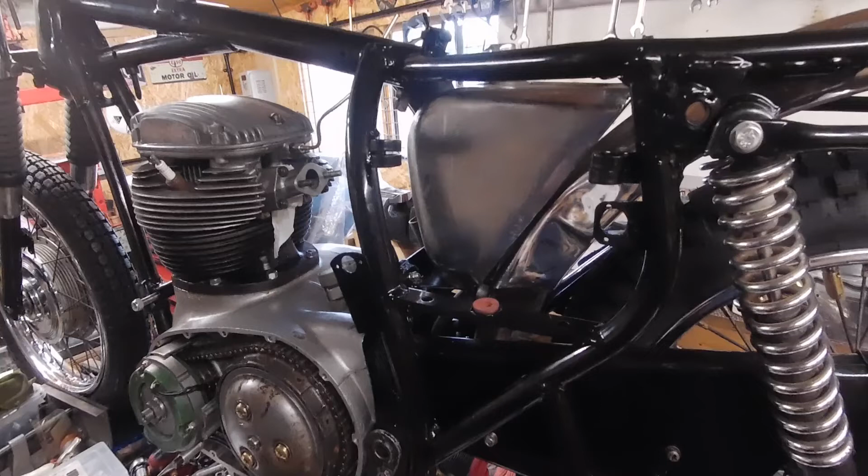Okay, so now going to start looking at doing some wiring. I think I said previously that there's no actual wiring loom that came with this bike, so I'm going to have to do one from scratch, which is okay, I don't mind doing that. In fact, I'd rather do one from scratch than try and work with an old one.

Especially as I'm fitting non-standard components like the regulator rectifier, which I've got to find somewhere to put, and also the control unit for the electronic ignition. Need to find a home for that, and I also want to try and incorporate a little fuse box somewhere, so I'll need to find a home for that as well.

I'm going to be using some thin wall wire. This is 16.5 amp, I think it is, so that should be perfectly adequate. And I've got some thick stuff there for the battery connections.

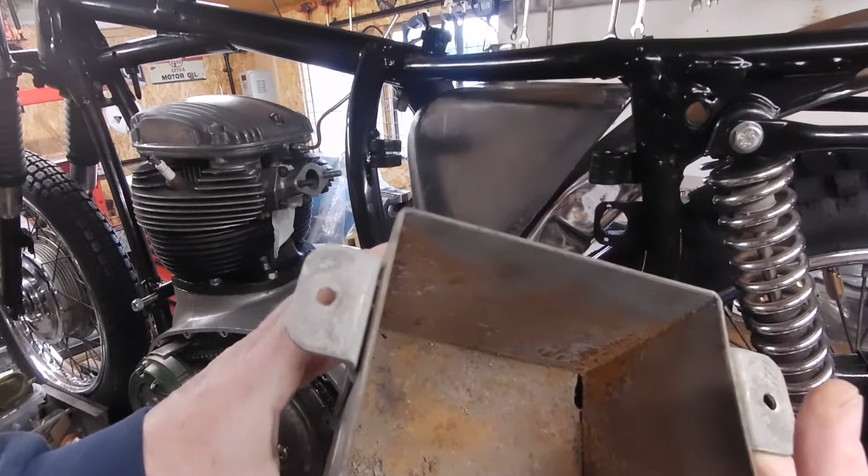And the other thing is, I did actually get a new battery tray. Don't know if you can remember, but that was the one that was on there, which is obviously not correct, with this big box thing on it. Yeah, I did consider cutting all this off and just using this piece here, but really for what it cost for one of these, it was just as well to get that.

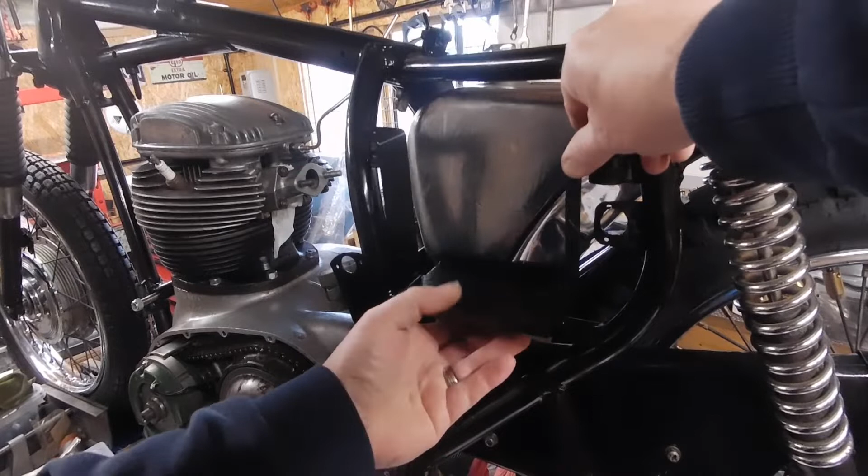I am just waiting for the special rubbers and special bolt that goes up, because none of that was on it when I got it, just to fix that in place, which hopefully will be here this week so I can get that attached.

But in the meantime, I can be working out where I'm going to put these other components, and I've also got a very basic wiring diagram. Tried to stick to the BSA colours where possible. Obviously some of these are different where there's a wiring loom that comes with the electronic ignition stuff.

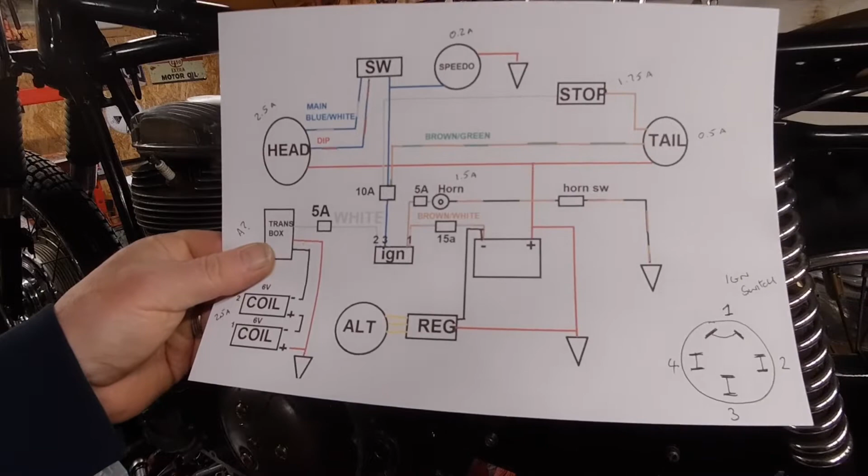So I'll be using that, and also the one that's attached to this regulator rectifier.

Yeah, so I'm basically kind of ready to start having a look at this, how far I'll get with it. We'll have to see. I've not as yet got a headlight or tail light, but that's kind of irrelevant really for this, because I could just leave some long tails, and a horn. I've got to get a horn as well, but I could just leave tails for that.

Yeah, so really can sort of make a start. I think the first thing is deciding where this is going to go, because this is probably the biggest component. I have seen other people fit them under there on top of the oil tank.

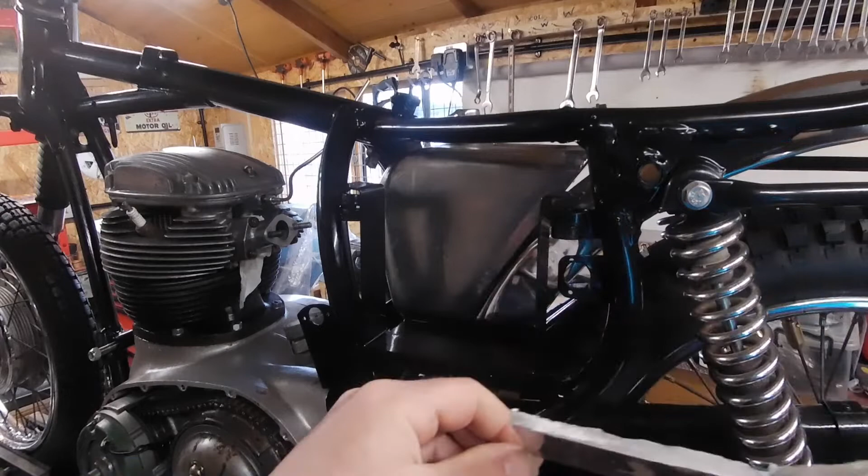That's not quite in shot there. Move it up a little bit. Yeah, sort of in here. So I might start with trying to make a plate to fit that to. I've got some various bits of aluminium plate. It's probably a little bit on the heavy side, that, but it will work. So I think that's the first plan.

I think will be to try and figure out where everything is going to go, and get it fixed in place, and then from there I can start running the wires to the various components. Yeah, so that's going to be the first thing.

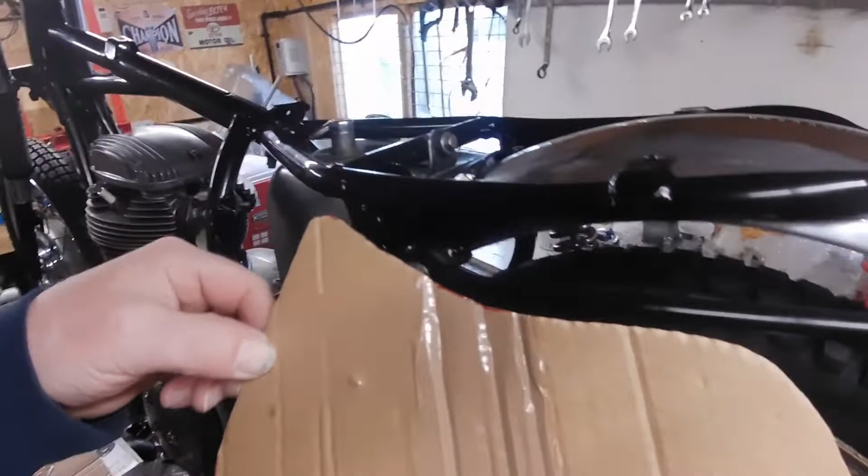Right, so I made a cardboard template, which I'm hoping will, once I cut it out, fit something like that. There is an existing hole there, which I think the previous owner must have drilled for some reason, so I can reuse that as a mounting point, and possibly a bracket off this fixing bolt here, the oil tank fixing bolt, and then I'll just need something over that side to hold it, maybe a P-clip or something I could use.

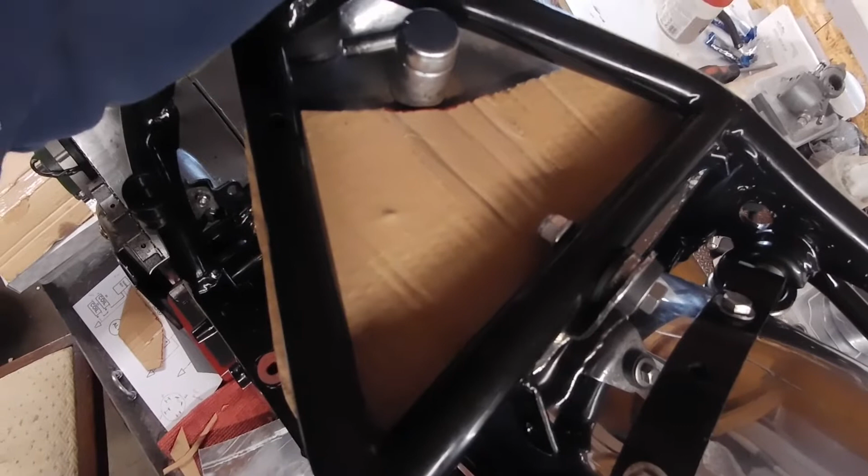Don't really want to drill the frame. In fact, I think I've already filled in a hole there before this frame went off. I think it was there. Yeah, I probably should have left it, by the looks of it.

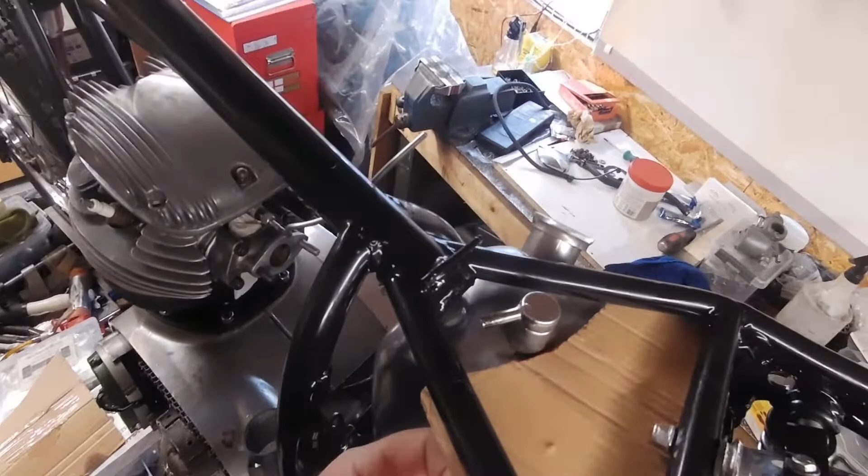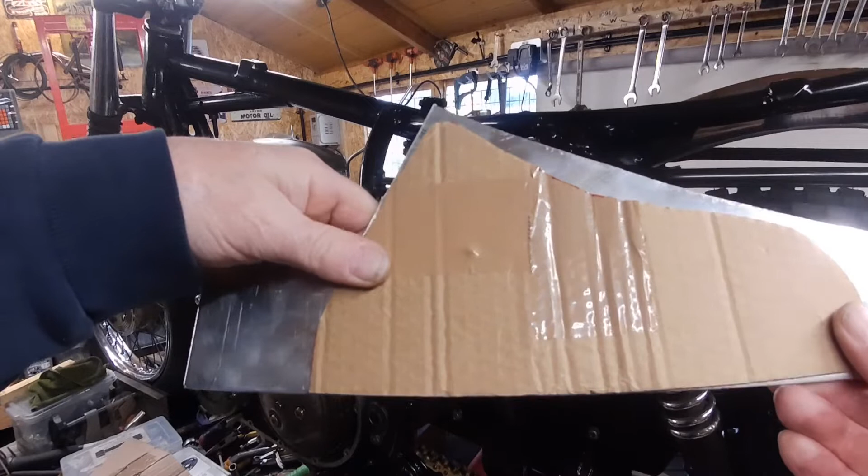But yeah, so there's my pattern, the template, and I think I should have, fortunately, got that in the right place on there. I should be able to cut that from that piece - this is 4mm aluminium, which is a little bit over the top, but I've got it, so might as well use it.

Right, got the thing basically rough cut. However, one slight problem is that won't quite go under - it gets caught up on this back frame tube because I've got this bracket here on the oil tank. It's just not allowing that to go down far enough.

Yeah, so I'm gonna have a rethink somewhere, I think. Find some other way around it. I did think about going off the top.

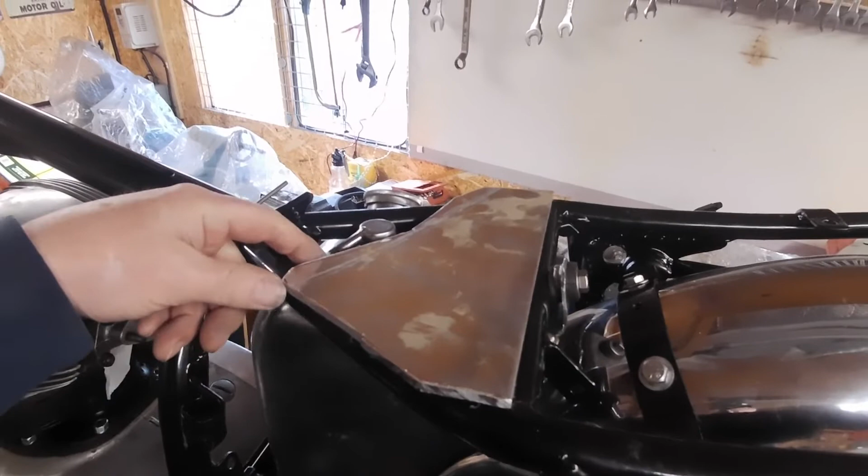Not on there, but I don't think there'll be enough clearance for the seat. Or if there is, that'll be very tight. So back to the drawing board, by the looks of it.

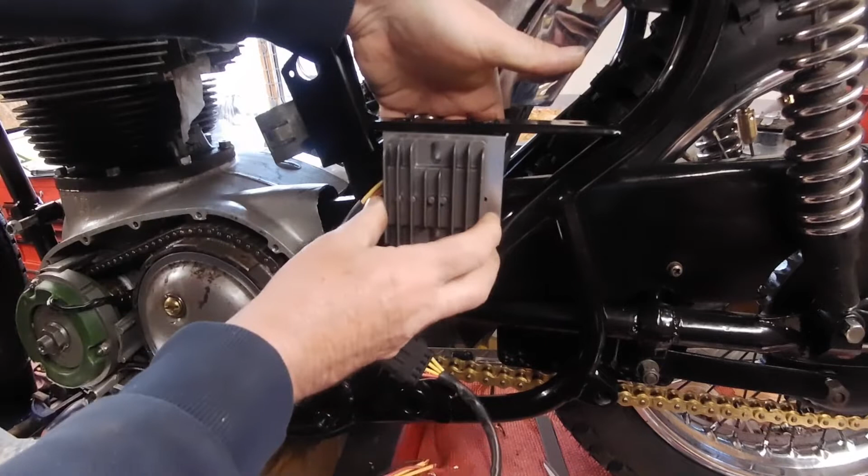Right, plan B. I'm going to use this bracket, fix that under there. I might just have to trim that corner off and that corner, and then I can mount that somewhere on there, because this will all be behind the side panel, side cover, so you won't see any of that.

So I think the first thing is to cut this down so it'll sit a bit further back, just to make sure I'm going to have enough clearance on the front for the side cover. So I think that's what we're going to go with.

So I'll just trim these corners off in there, and then there are a couple of holes already in here that I can use, and obviously I'll need to leave a hole for when that goes through there. So that goes very far through. Yeah, that just about sticks through there, so we'll need to just allow for that.

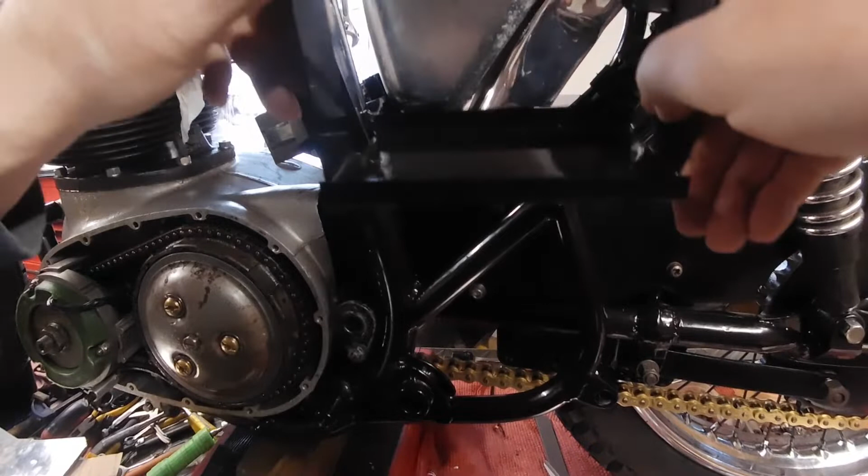But I think that might be the better choice. This can probably just be fixed up the top, maybe with a P-clip around the rail, and cable tied. I don't think that'll be too much of a problem.

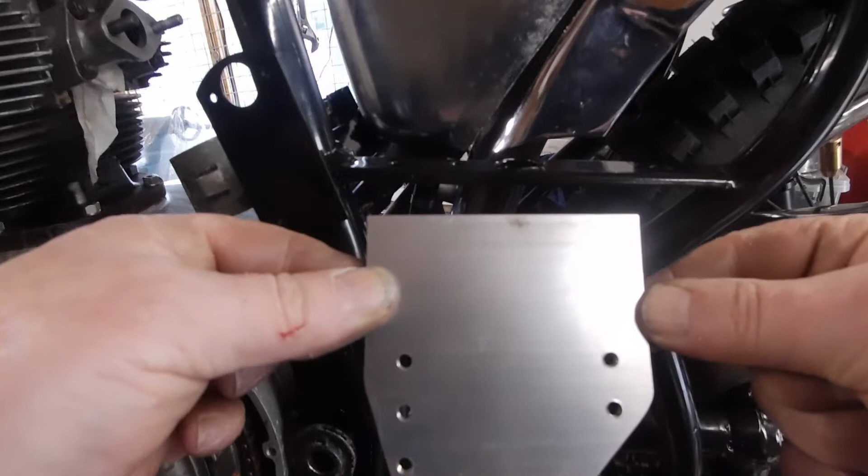Alright, so that's the bracket, shaped a bit to fit in a bit better, and I've just put some riv nuts in there to attach it on with. It's a little bit easier than trying to get around the back with trying to put nuts and washers and stuff on.

I will just use washers on the top, I think. These are just M6 riv nuts, and hopefully for me things line up correctly. And there.

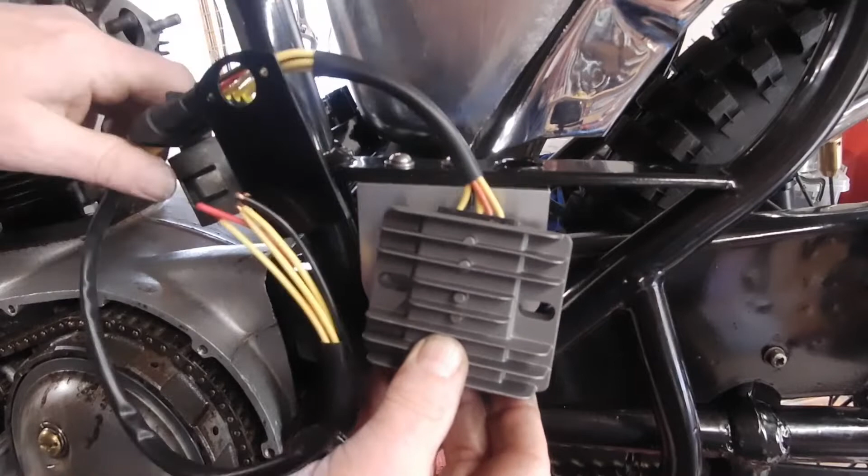Right, I think that should work quite well. The only thing is now is to work out exactly how or where to position this. I might even be able to use some of these existing threaded holes, because they do actually line up perfectly.

I think I might just attach it and see how much shows on this corner when the cover goes on, just see how it looks. If not, I might need to just drill some more a bit further up. Try there first, see how it looks.

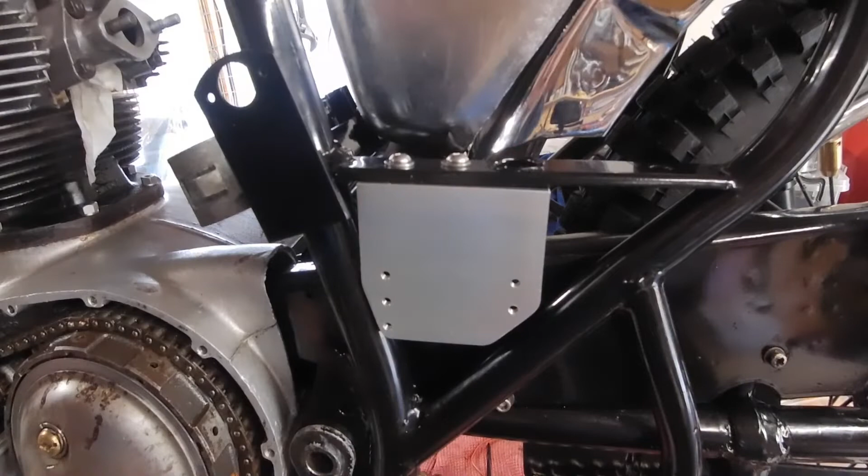Right, so that's that fitted on. Do need to get some better washers, these aren't quite the right size. I'll either see that, or re-drill those and tap them for M6. So I think these are probably what they should have in there.

So the cover will go somewhere there. Yeah, that is actually not going to work, I don't think. I'm sure that shouldn't be that far out, that cover.

Yeah, so that is going to have to go up a little bit. That should be somewhere around there. Yeah, that's going to have to go up, either up or at an angle. I'll have another little play about with that and see if I can get it in a better position.

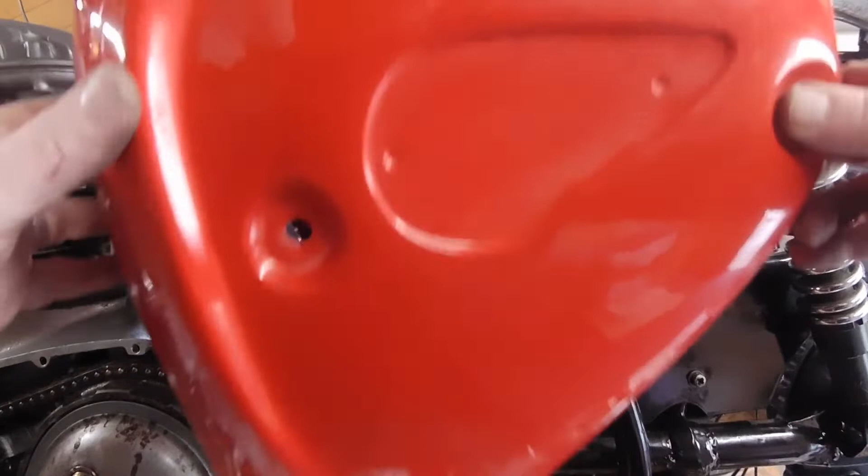Right, that is about as high as I can get that. This does fit a little bit better. It's still not quite, it's still a little bit tight there. And the other thing I'm not quite sure of is exactly if this is in exactly the right position.

That rear one there, because I haven't got the proper clips in there as yet, so it's hard to tell. That one is in line with this one, which is fixed to the frame. However, the front one is a little bit out. This one is too far forward.

So whether that bracket has not been made very well, it's almost as if that should be twisted back a little bit, which, if it is, I think that will probably help. It's a little bit hard to tell until I actually get the proper fixings in there, because I'm not sure how far this is meant to stick out. So I think the next thing is to order the clips that go on there, and see exactly how that is going to fit, because there is still a little bit of tightness here.

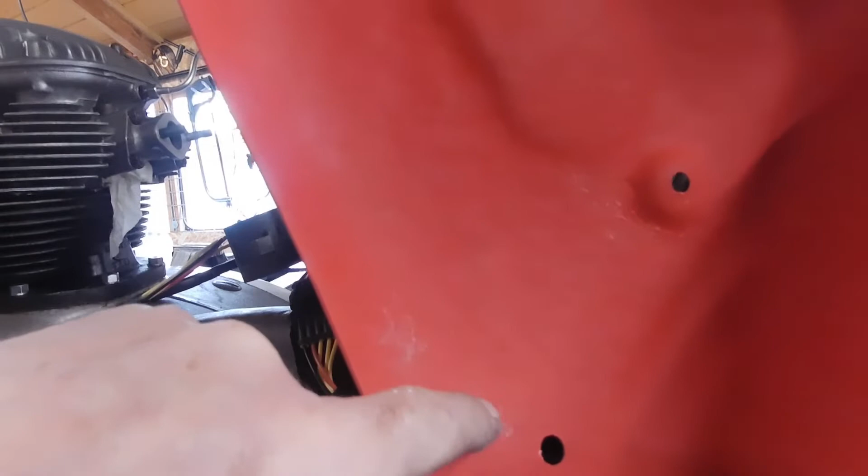The only other thing to do is cut a little piece off these lower fins, because it's just rubbing on that lower corner. So that is one option. It can't go any further that way, and it can't go any further that way, so if it does go there, that's where it's going to have to go. I did look at fixing this on the back, but there just isn't quite enough room, not with the bracket fixed here anyway. I would have to come up with some other way of fixing the actual bracket to this cross member.

Yeah, I think what I'll have to do is order these Oddie clips and see exactly how this panel fits on, exactly how much clearance I've got. It's all a little bit of guesswork at the moment.

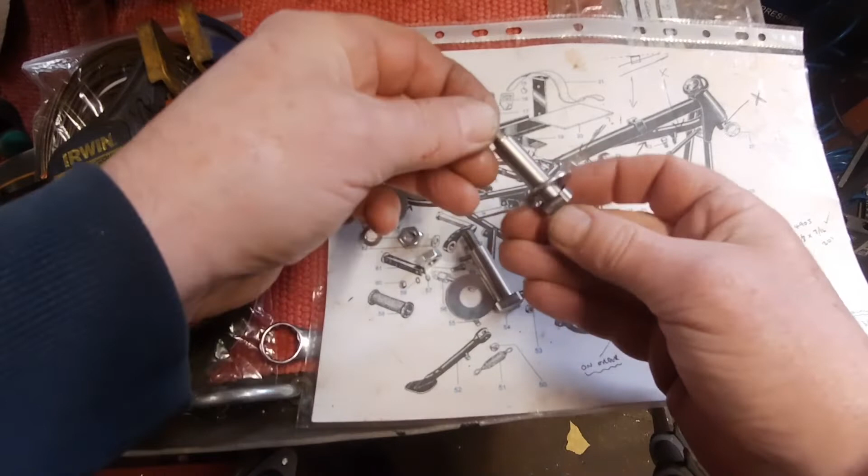Right, now you've got the parts I need to put the battery carrier in. It's got these shanked bolts and 3/8 washer, then there's a rubber, these 9/16 washers, another rubber, and then a spring washer, which don't want to go on. Let's try this one - spring washer and a 1/4 inch nut. So that's the basic layout.

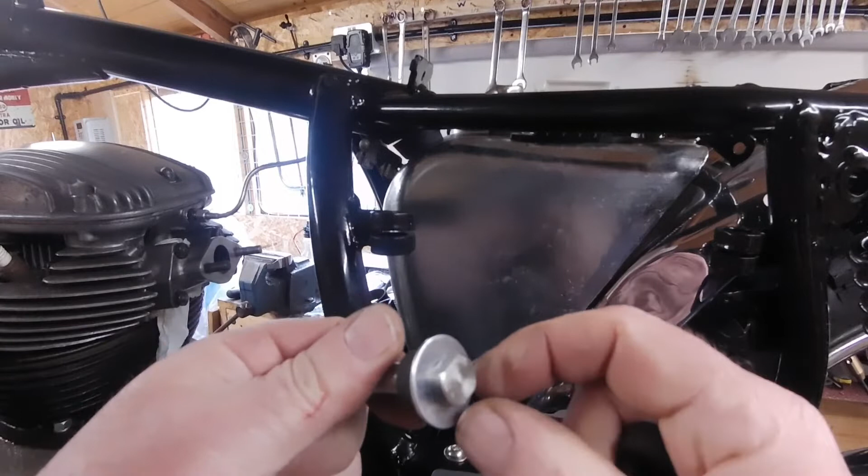So I'll start getting these, get this battery carrier on now. That's a little bit tight. Let's try that one. Oh, that side is okay. It needs opening out a little bit. It's got nipped up, I think.

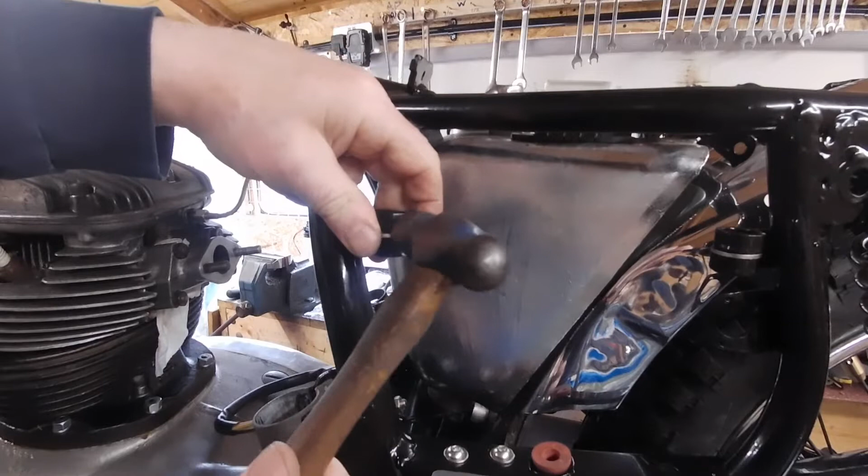Probably too much now. Let's try that other washer in there. Yeah, a little bit tight at the back. Right, so that rubber in there. That should push up like that. Not going to stay there though, by the looks of it.

Rubber on the top, perhaps that'll hold it. Don't let these shanks be too long. Well, the rubbers are too short - look like the rubbers are too short to me, because I would have thought that is meant to isolate it.

And by the time that goes on, there and there, there's nothing kind of pulling that down. I wonder if that needs another bit of extra. Oh, perhaps that's how it goes, just sits like that.

Yeah, perhaps that's it. Right, spring washer, nut. I think this frame has all got a little bit bent out of shape, because that is a bit of a tight fit. That needs pulling over a little bit.

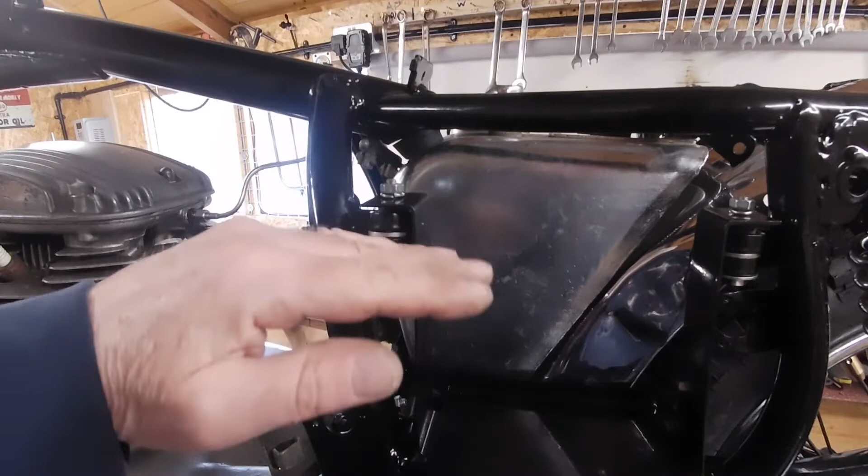What I want to do, if I can find it, the fuse box, is mount that on the top. I've had a look at batteries, and I can find one that will fit, and it should come sort of back there somewhere. So there's a little bit of clearance in the top there.

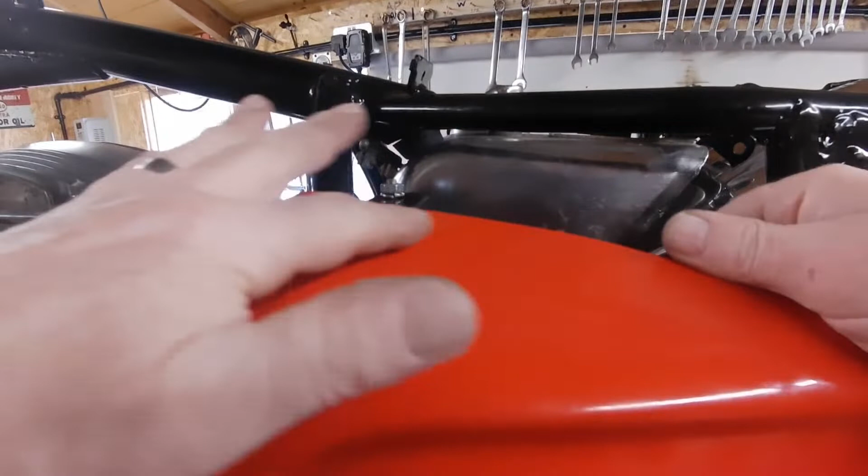A piece of aluminium plate, if I can cut a strip of that to go across the top, and then mount my fuse box on there. I think that's what I'm going to do. We'll try it. Should just come under there, I'm hoping, and that goes on. So we try it. Oh no!

So next thing will be to cut a piece of aluminium just to go across there - the fuse box. I've mounted that there. I didn't cut this right, it's slightly thick, and also it's got that tread pattern on it. So I did find a smaller, thinner piece, which probably won't end up staying, but until I can get something either longer or wider, I'll try and set this back a little bit further, because it is still a little bit close on this corner to the side panel cover. Ideally it probably wants a bit of an angle like that, but I will need a wider piece of this to do that.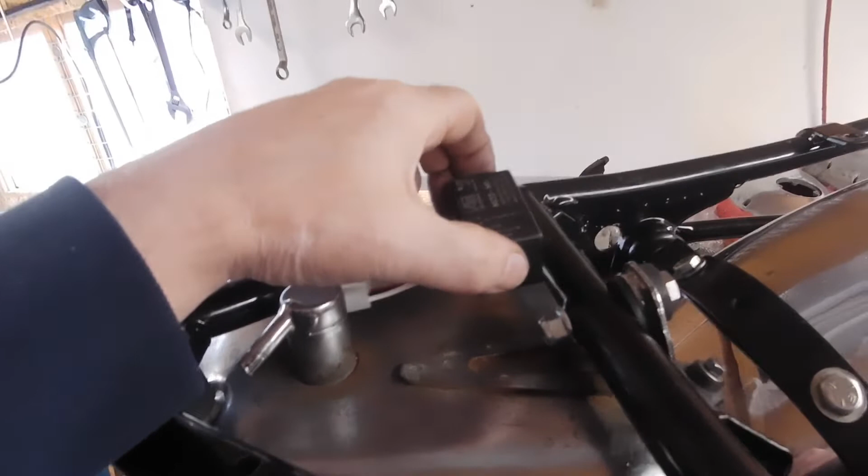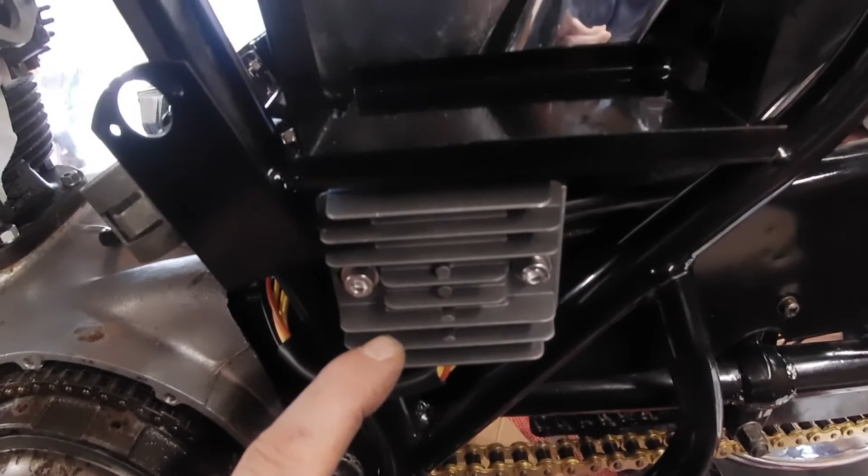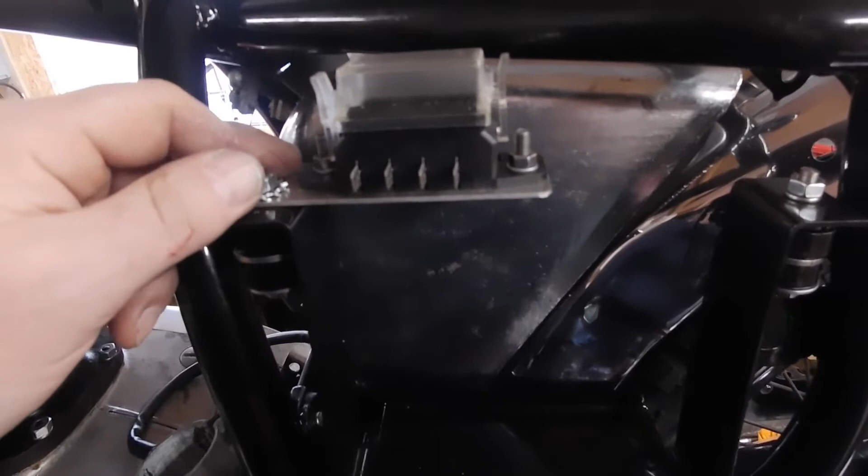Yeah, that's going to be roughly there, so at least I can do the wiring now. I think that's just going to have to sit in there, cable tied maybe. Yeah, so that's going to go there, that's going to stay there, around this area. If that's too tight with the cover once that's on properly, I can take it off this piece of aluminium, or even mount it to the top of the battery with some double-sided foam tape or something. It's going to have to go around there, so as long as I leave enough slack to move it around a little bit, I think that'll be fine.

So now I have all my components in place, apart from the coils, which I need to get, because I need two 6-volt ones rather than the 12-volt ones that were on here. Although I can still wire it up, because I know roughly what needs to go there. So I can start doing some wiring now, at last.

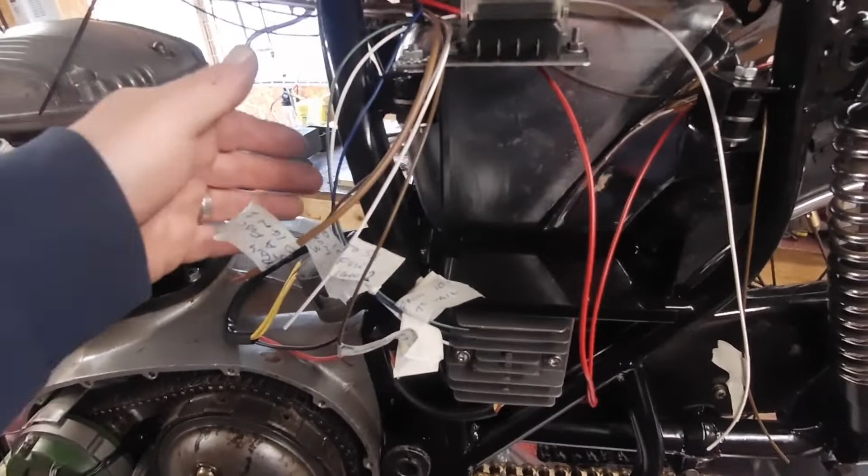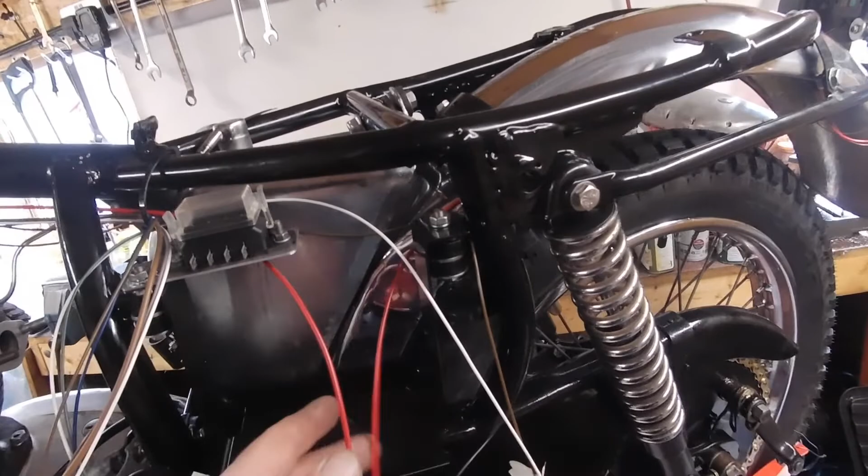Right, wiring so far. These are basically all for the fuse box. Some are going towards the ignition switch, others, I think one or two go towards the back. I've got my common grounds here, and positive earth.

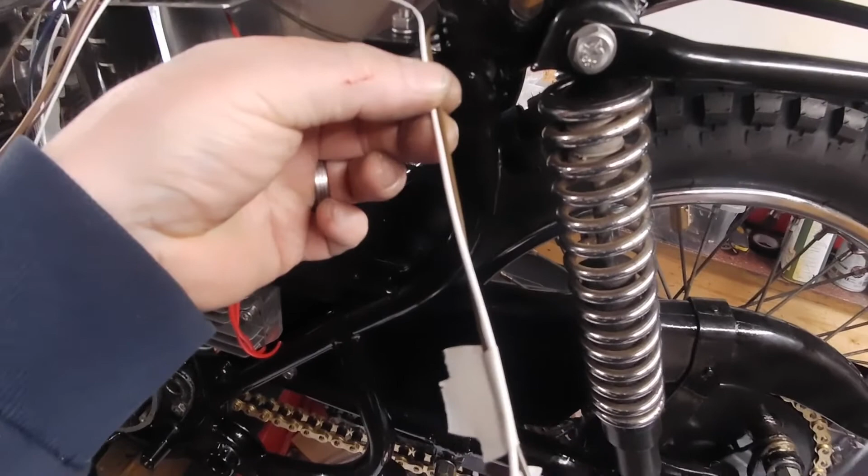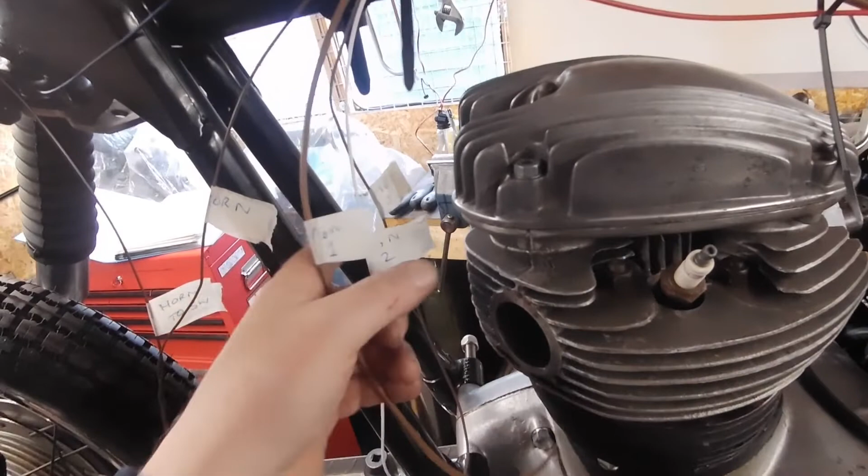These are for the brake switch. Here are the rear light wires. This is obviously going to be the main loom coming up here. I've just got them hanging in cable ties temporarily, just to run them through, the easiest way to do it. These wires here will be for the ignition switch.

It's got the feed in, this big brown one. Then got ignition and what was the other one? Lights, yeah, for lights. So it's ignition and lights there, using a full pole switch, ignition switch. Obviously you won't be using the horns or anything, I doubt.

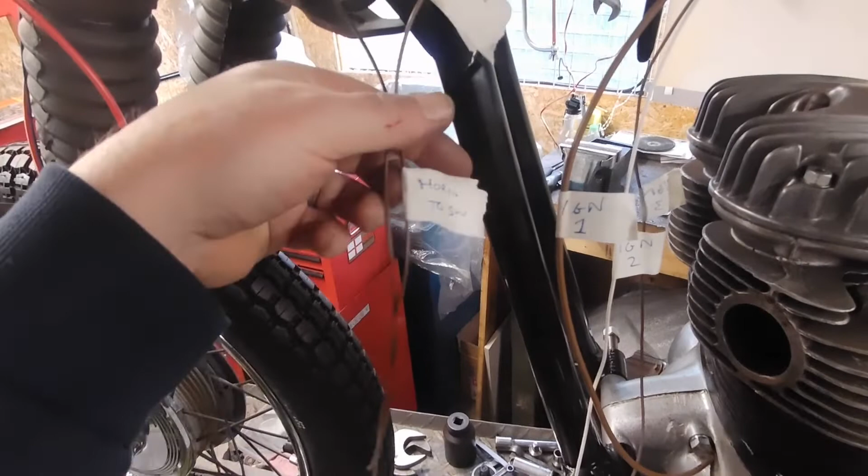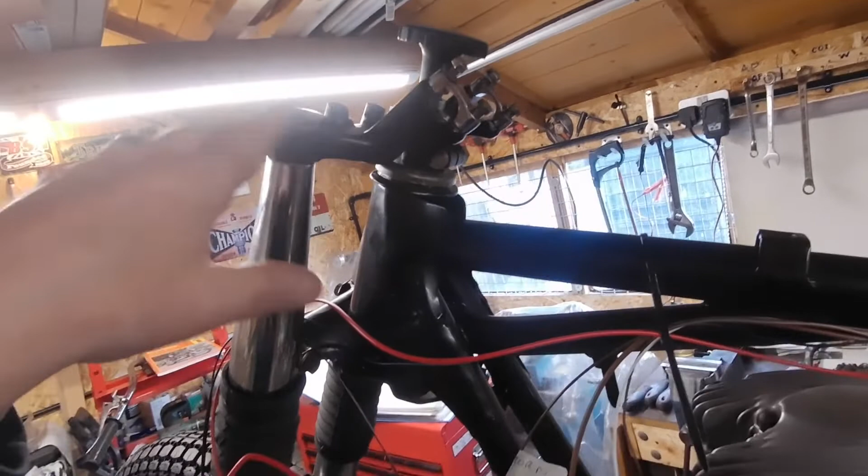Right, and these ones are for the horn. That one comes from the fuse board. That one will go away to the horn switch. And then we've got this will be for the lighting switch, this one here. Obviously anything up the front end I can't really do just yet, but that should basically be everything heading that way.

So I could actually get a piece - I've got some heat shrink, so I'll put heat shrink all over that lot and bunch all these together, whichever side they've got to go. Unfortunately I've run out of connectors, so I couldn't actually connect anything up as yet, but I've got to run all the wires through some heat shrink anyway, and obviously a bit of heat shrink around that to the rear.

These for the ignition unit, they've got their own kind of looms, so I don't really need to do anything with them just yet. I can do them at a later date, same with these really. These have only got to be connected to the alternator wires here, and these are the battery feed and ground. They can be done at a later time because they only need to be terminated on the battery anyway.

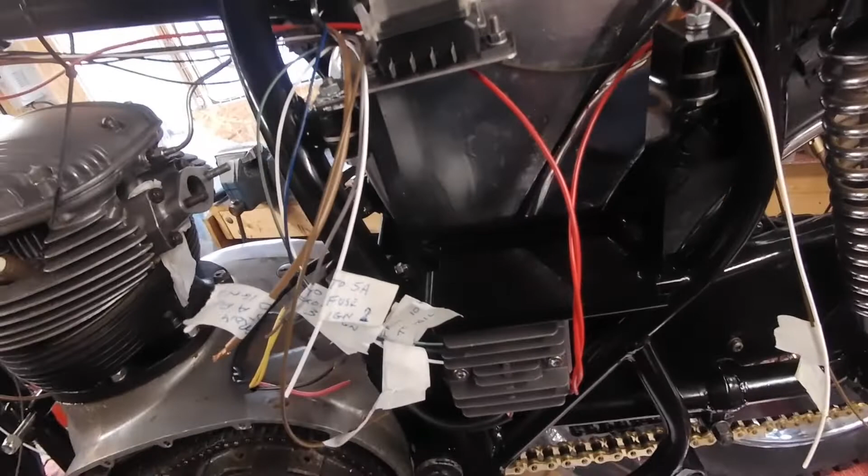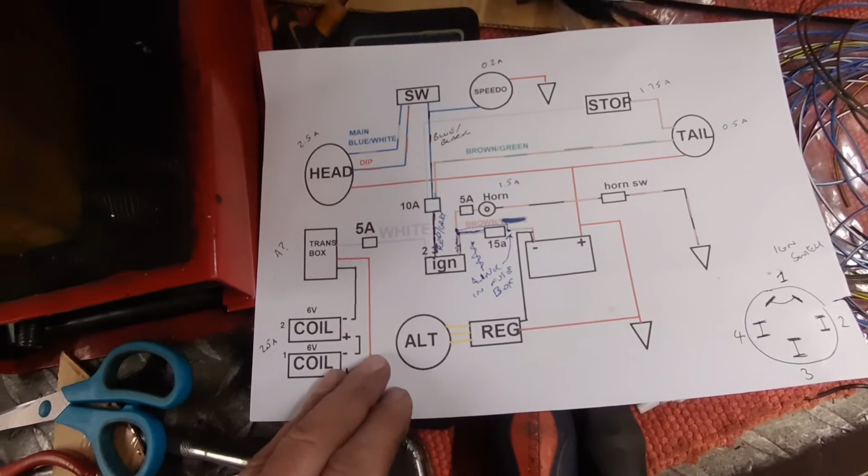So basically, that didn't take probably, maybe an hour and a bit to do. Just got to redo a couple of bits on the wiring diagram, change of colour there and there, because I forgot to get some plain blue, but I did have some blue black, so I'll use that instead. What else was it? And red grey there. And what was the other one I changed?

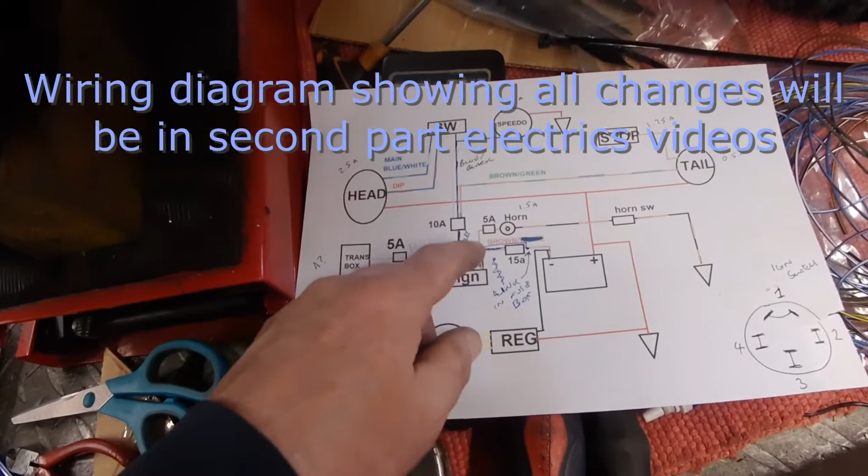Oh yeah, I originally had this come back from the ignition switch, which seemed a little bit pointless. I could just pick it up off the 15 amp main fuse, 5 amp for the horn. I can do all that at the fuse box really, do a little link cable there. So basically that is just about it, apart from putting everything in heat shrink and terminating. So not too bad at all really.

Right, so got some heat shrink on there. I've got my ignition switch wires, horn, and these ones that go up to the headlight. That will obviously need a bit of heat shrink on there, but until I get the headlight on, I don't really know what sort of length.

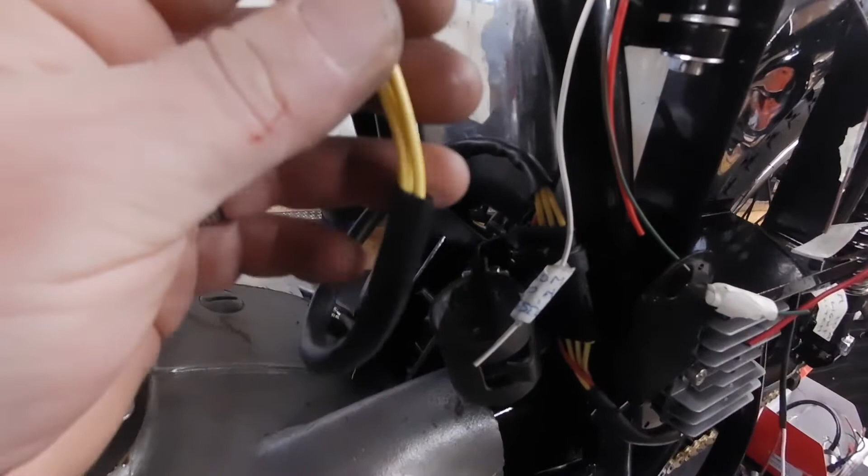And oh yeah, this one, the regulator rectifier, I did just separate so we're all in this one sleeve here. I've just separated the alternator ones from the battery ones, so I'll split those. These now come up here just to make that a little bit easier.

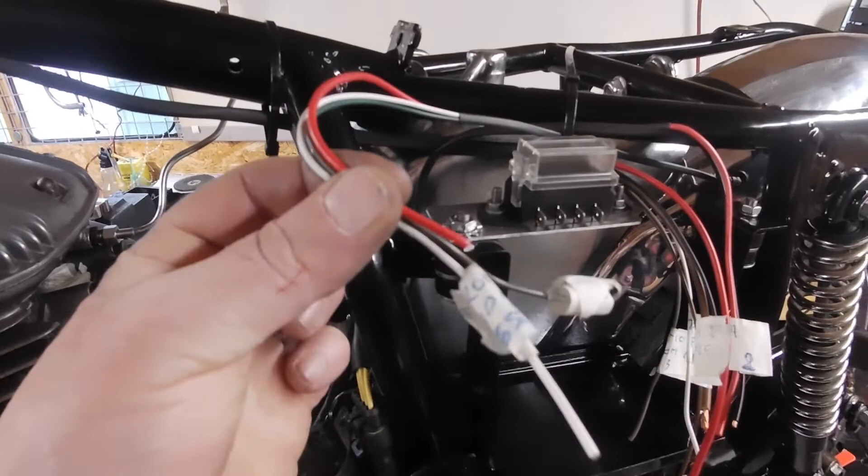So these are all the ones that come in the main loom here, which all got to go onto the fuse box, and battery or ground, and these are the ones which go to the rear, and this is the brake switch wire.

Ready. Yeah, so I've tucked all them under there with some loops built in that mudguard which I've used, and yeah, just got to drill a hole for this to go through once I've decided on what sort of tail light I'm putting on here. So that is pretty much it, apart from the connections on there and battery connections, alternator connections, ignition switch, headlight, just about there.

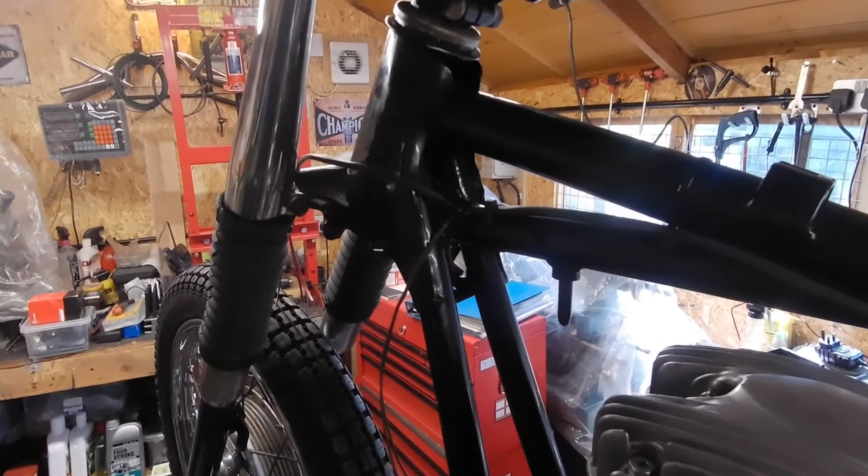Alright, doing a little bit more prep. Just been putting some heat shrink over these wires. These are the ones that go to the headlight. That's for the horn, and this one tucked around the back here and through there. It's for the ignition switch, which fits in here.

And so I can get that in, I've just had to take the damper off, the steering damper. Have a look at the switch in a minute.

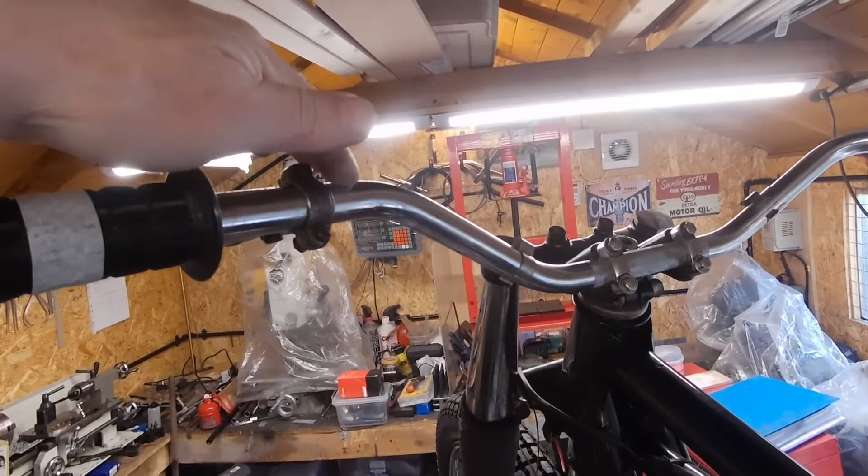And the other thing is I've fitted these bars on. I don't think these are the correct ones actually, I think they should be a little bit higher, but I've put them on because I need to mount the switch so I can get a rough idea of how long I need to make the wires.

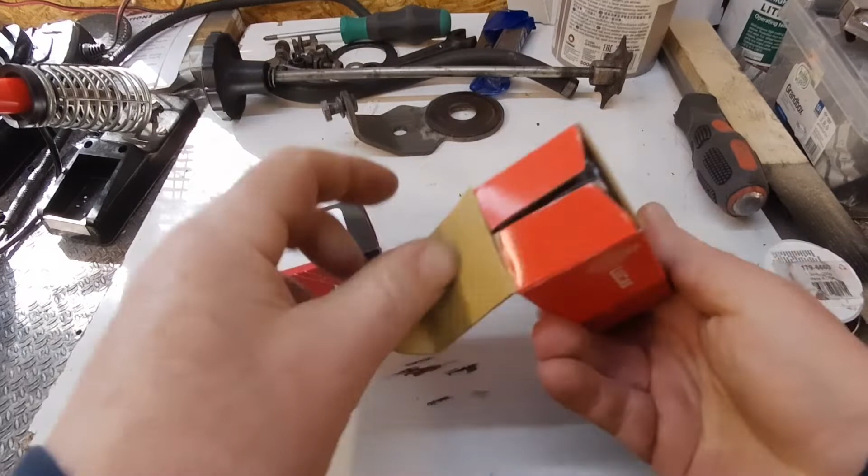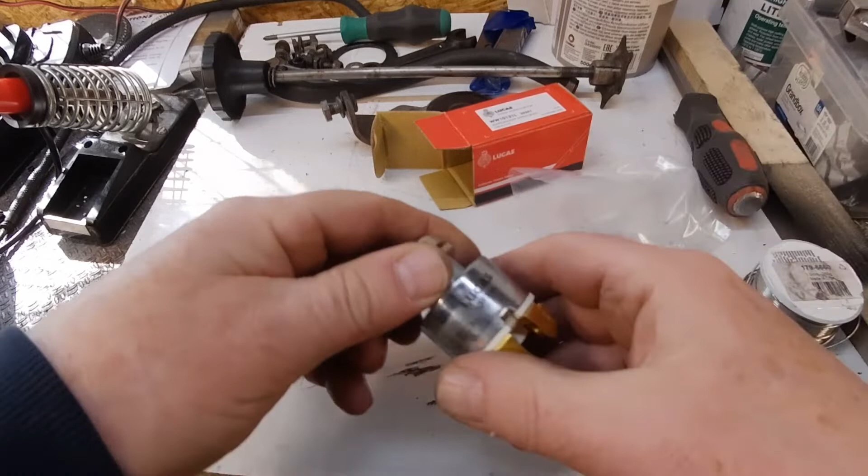Okay, ignition switch. This is actually meant for a later bike, I think 1970 onwards, somewhere around there. I started using these Lucas 35351, which is a 4-pole switch. There is a reason for that, why I'm using this. Not the, what should be on there is a 2-pole, obviously just on off.

This has, sorry, it says off, parking, ignition and lights. The reason I'm using this one is so I don't have to have a light switch, an on-off light switch, just a dip switch. Just saves a little bit on the headlight, because the headlight I'm using is not going to be big enough to have a switch on there. So that's why I'm going with this one.

As you can see, it comes without a barrel lock, which is what this part is. And I think these just basically push in. Comes like that. It's got a little pin on there. I think that's sprung loaded. Yeah, I believe this just pushes in, and that little spring bit hooks in somewhere.

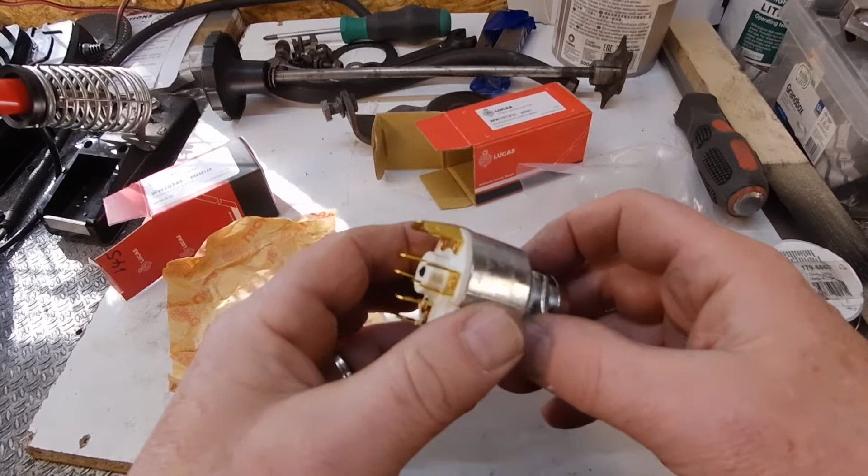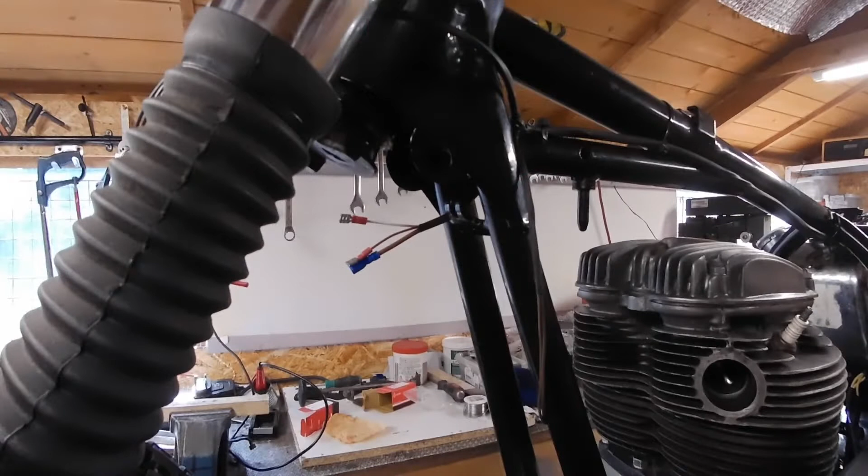Yeah, should go in there. Don't think that's any much deeper than the other one. The only thing I want to do is try and get some sort of enclosure on the back of here. You know, the other ones you can get a rubber boot for, but I couldn't find anything for this one. So I might have to come up with something, see what I can find anyway. Right, unfortunately got the light behind, so it's probably not very clear.

Right, so I've just put my terminals on the wires for the ignition switch. So number one is this one at the top, or one of those ones there. That's number one. Actually, I'll put it in the other side, might be better. Put it on that one. So that's number one. Number two, which is that one there, and that needs to be the white wire.

On there, and then number three, that bottom one, is the grey red. That's just those three wires on there. Right, so that can now be installed.

I couldn't actually find any rubber to go over there. The only thing I had that was close was this, and that was way too big. Well, actually on that way it would have gone, but yeah, that's way too big. So if we come across anything at a later date, I'll just have to change it.

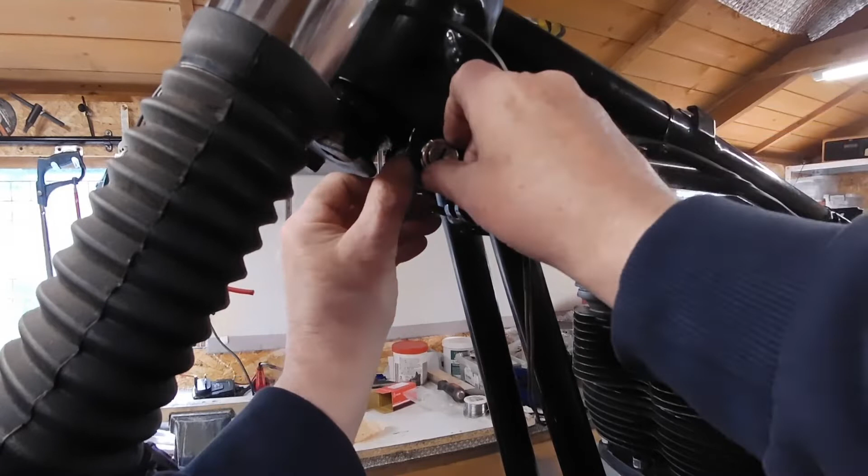That then goes on the front. There's a locking ring on the rear. So if I do that up as far as that will go, and then tighten up the lock ring, or lock nut behind. I think would be the best way to do that.

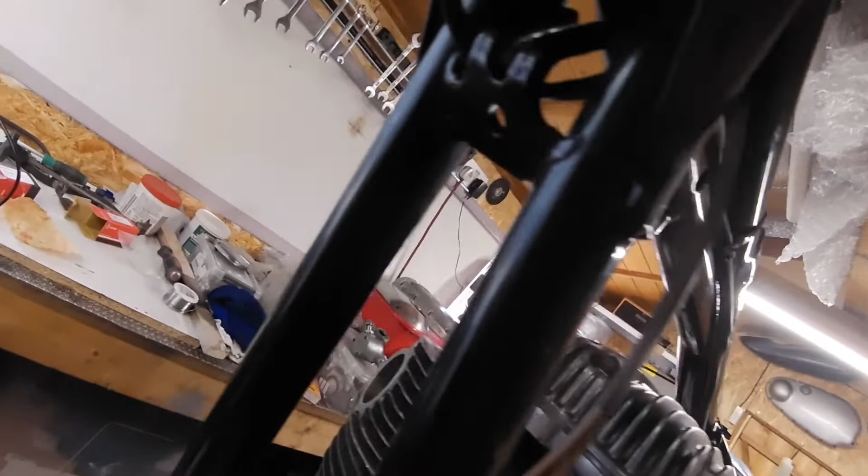Let's get a spanner on there. So that is basically it, the ignition switch. Get in here at a funny angle. Not this is very good at close-up stuff, but yeah, you see that only just goes in there. A little bit of a bend on the back of these wires. I think that'll be okay.

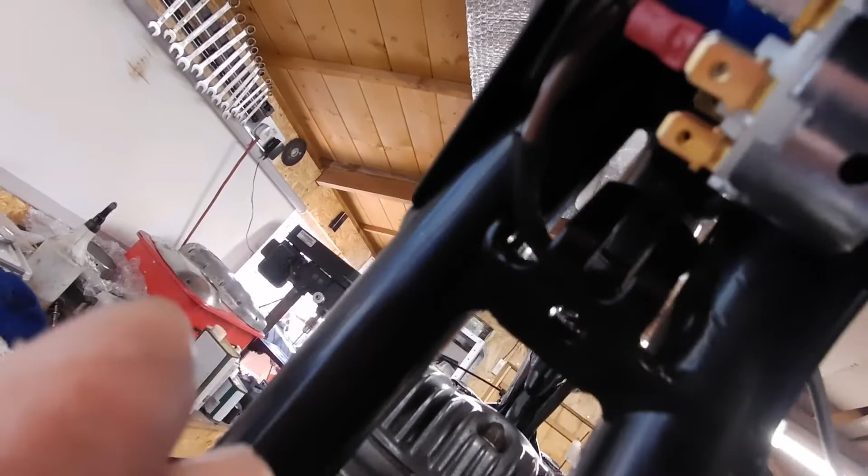Alright, let's just do a little bit of a sanity check here. Let's put this round. Difficult, all these wires in the way. Put that round to there.

Continuity check. So I've got one lead on the brown going to the switch, and that one's on the white, which is the ignition, and this one is the ignition and lights. So at the moment we shouldn't have anything because it's off. So if I now go to position 1, there we are, we have continuity between those two, and there shouldn't be anything on there.

Right, so if I now switch to next position, which would be ignition and lights, so now got continuity to this one, which is for the lights, and I should also have it on this one, which we have. So we know that switch is all good, and the wiring's all coming back here.

Started to wire in the fuse box. I've just swung it out a bit so you can get a better look at it. So far, that brown there is the one that goes to the ignition switch. That is to the horn, and there's 3 wires in there.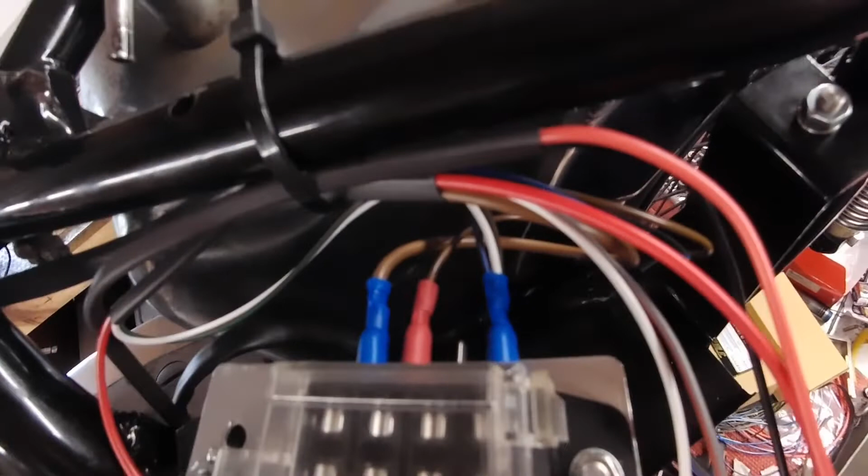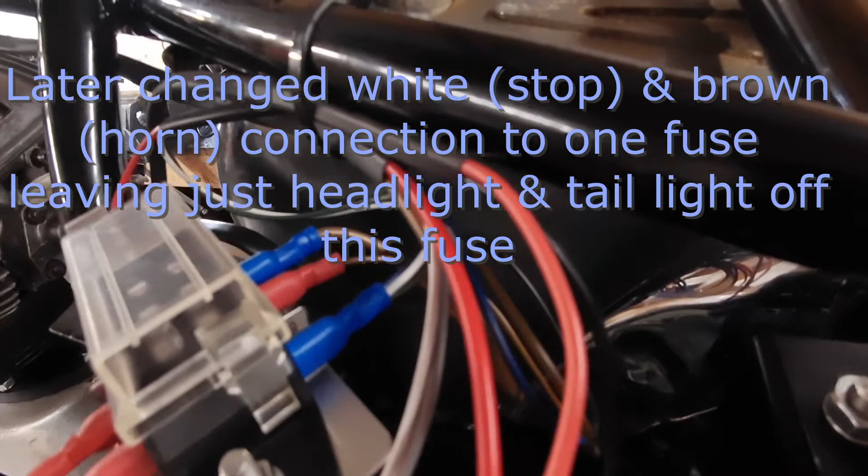One is, get the wire diagram, so it's brown green to the tail light, white to the stop switch, and the blue black will go up to the switch for the dip and main beam. So there's all 3 in there in that one.

So that'll be a 15 amp, 5 amp, 5 amp, 10 amp. And this grey red is from the ignition switch, and the white is from the ignition switch.

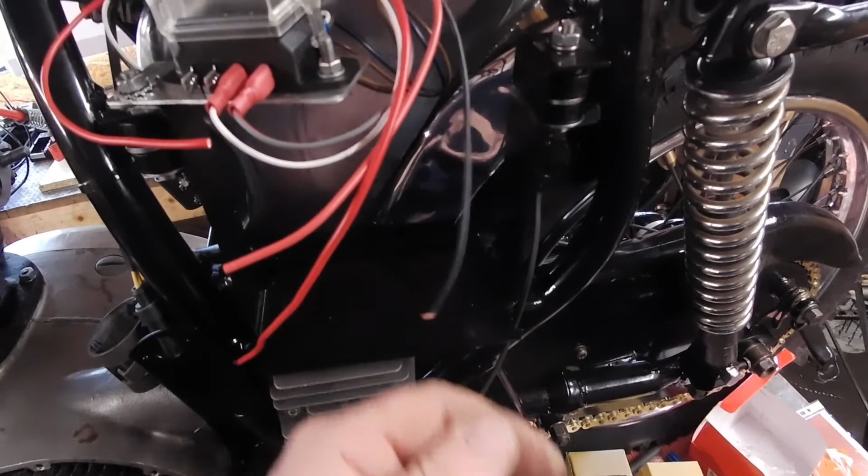So the only ones I've got left to do is that one there, which will be to the ignition module. Yeah, to the ignition, like the transistor box. And then there'll be a link cable across there, or link wire, with one going away to the battery negative, and obviously I've got all these from the grounds, the positive ground and battery connections, and that's also got to go to negative battery. Yeah, that one's from the regulator.

Yeah, so I think I'm now going to have to make a final decision on where this box is going to go. This transistor box for the old wassail there. So there's all this to go on as yet. And I think that's almost certainly going to have to go here.

I can't really see anywhere else. I mean, there is this bracket here. I don't exactly know what that's meant for. Doesn't seem to be doing anything at the minute. So yeah, but I definitely know it's going to fit there. So the wires can easily run away under here. So I think that is going to be where it's going to go.

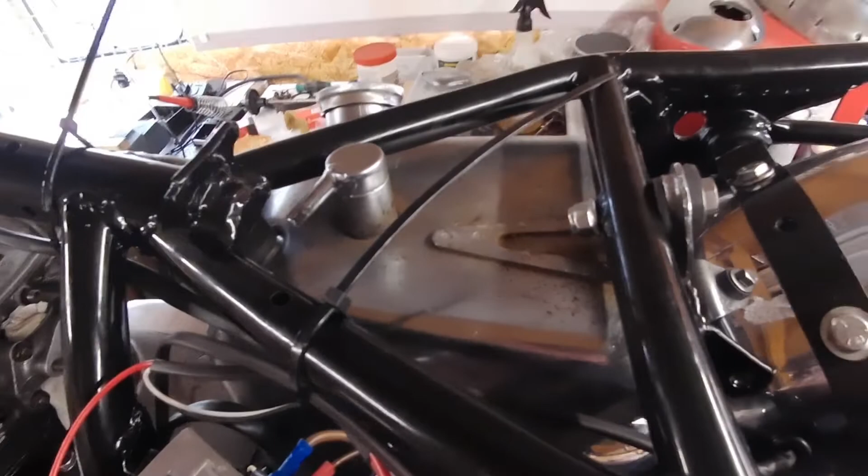This is my main earthing point. So this thicker one here will go up to the battery, and this thinner one here will just be for the coils, which obviously sit here, which I haven't put in yet. And this is the other lead for the coils, which comes from the ignition unit. So I will get those in next and wire them in.

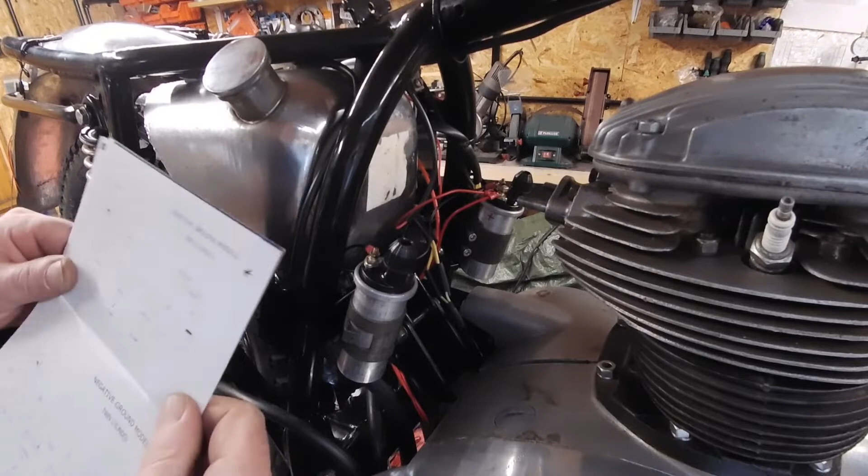Right, coils fitted, wired in. So this is the red black that comes from the ignition module. So we've got the red one going to the positive side of the first coil, and there's also the red ground which I put in earlier, which goes down here. So it's on this diagram, that red one there, and to ground.

Then there is this black lead which goes from this coil, negative side, to this coil, positive side. So that's here, that's that black lead there, and then there's the other black lead which goes back to the ignition unit from the negative of this coil. So these are wired in series.

They're two 6-volt coils. This system runs on a wasted spark system, so it probably doesn't really matter which way round you put your first wire, as long as you wire them in series. Yeah, so that is that done.

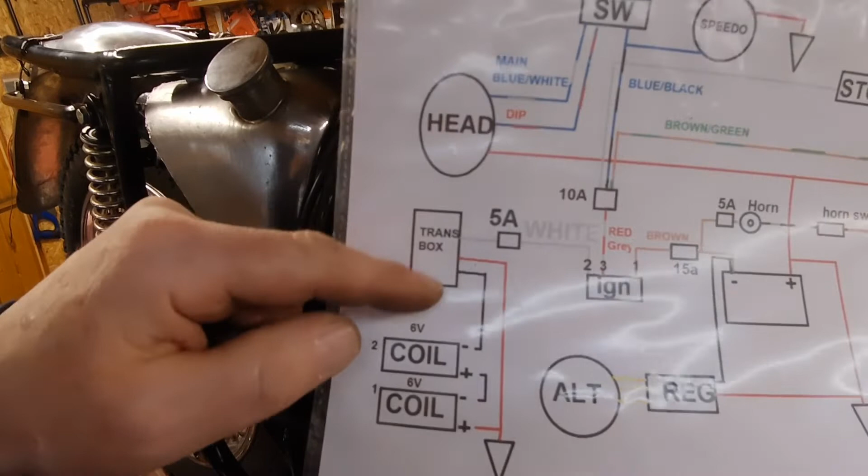Leaflet. There we go. Right, so that's on my drawing, probably a bit clearer. So that's the little module. Red wire to ground and also to the positive. Black from negative to positive, then the other black wire from the unit to the negative on that one.

So that is sitting up there, and these are the two little connectors just tucked behind there, and they've also got the, to bring you down a little bit for, maybe it's easier off the tripod. Yeah, so that's the other connection for the pickup unit.

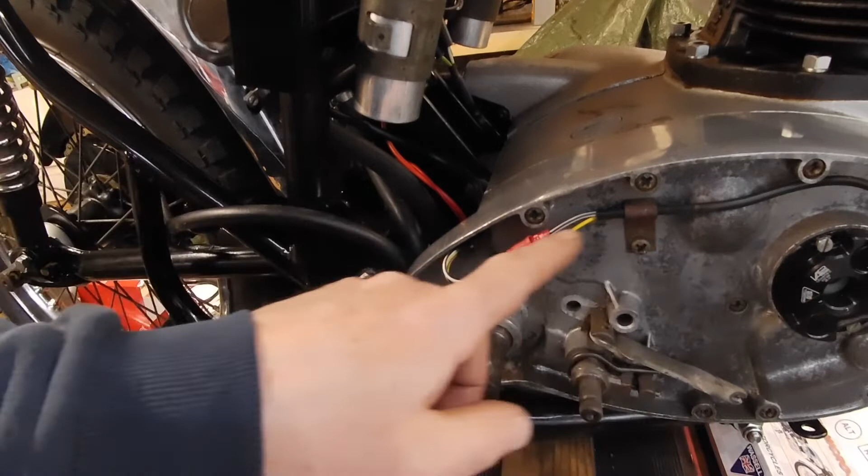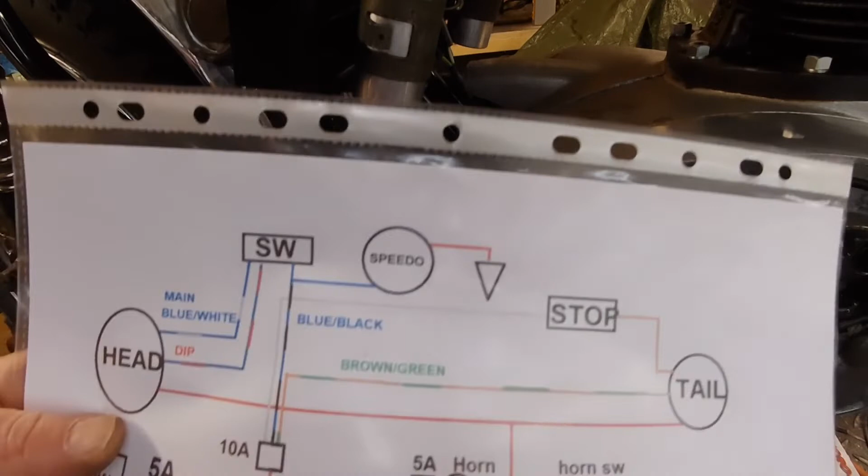So that is all wired in now. I've got the handlebar switch to rewire because I want to change the colours on that, if I can find it. I think I might have left it indoors actually. Yeah, I just want to change the colours so they match my diagram. So I'll rewire that and get that on the bars.

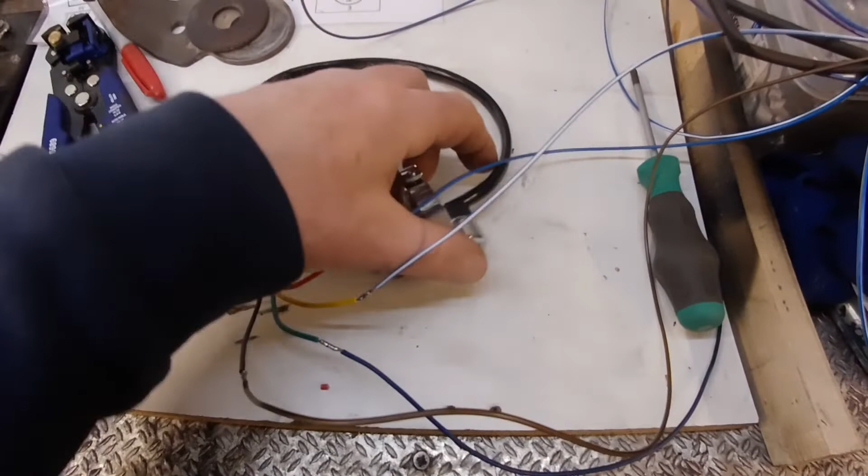Right, found my switch. That was right in front of me, couldn't see it for looking. Yeah, what I've done, I've actually just extended the appropriate wire to the colours that I'm using, because this was going to be too short anyway. I would have wired it right back, except I was a bit short on, which one was it? That one, I think, the blue black. I only had a short piece of that left.

So I just need to get some heat shrink on these joints and extend that, or I could even put a complete new piece right over the whole length. Might actually look better. Although this is flexible stuff, so I'll see where this joint ends up when I put it on the handlebars, see whether I'm going to actually extend this or just put a new piece. I think that'd be the best thing to do.

Yeah, so that'd be my switch. So that would be my low or dip and high beam, and that'll be the horn, and that one is meant for a kill switch, but I won't be using that. I don't need that. It's not actually wired in the back. That's what that's actually meant for.

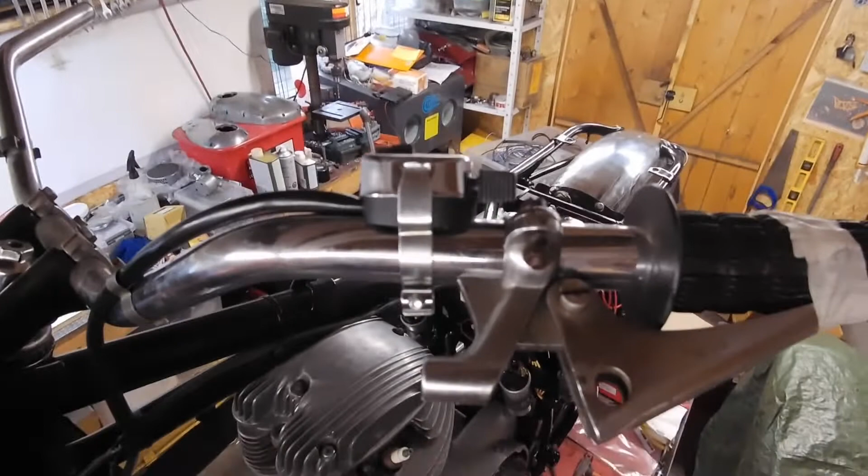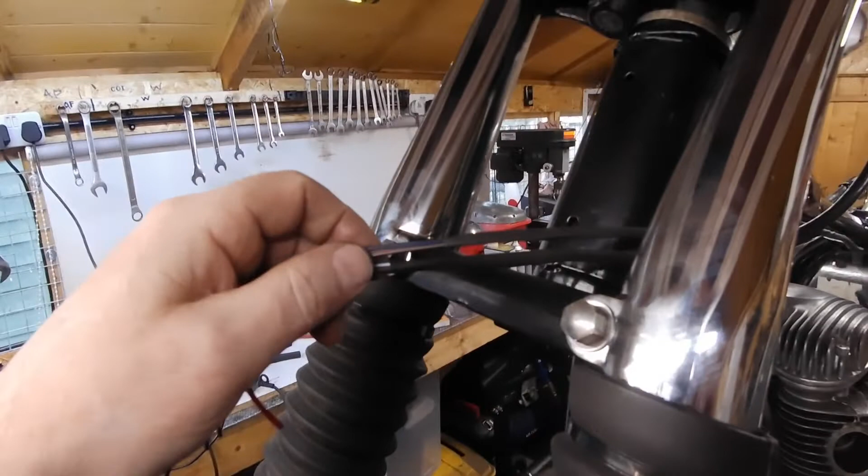Yeah, so I'll get this sorted up and have a little test fit on the handlebars. Right, switch is mounted up there, and cable running down there. I'll come through here, and when I eventually get the headlight, these can all be connected up inside the headlight.

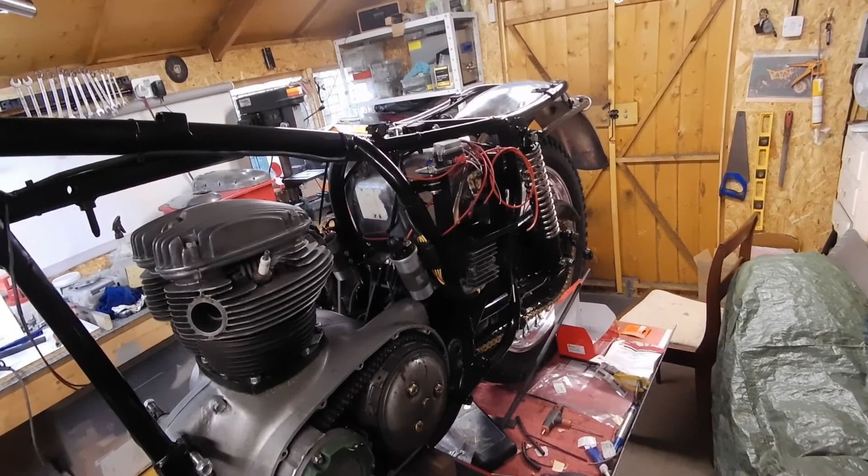So that is about it for now. Just need to, I've got a headlight coming. Just need to order a tail light, but there's no real rush for that, that can be right last minute. Battery, that can be last minute too. And yeah, just got to finish off the wiring on here, which could just wait until I get the battery really. So everything is pretty much electrics done.

Oh, horn, I've got a horn coming as well, it's got to be fitted. Yeah, and I've also got another piece of plate here which I may or may not use. It's a bit longer, would go right the way across, but yeah, we'll see with that. Yeah, so pretty much done with the electrics.